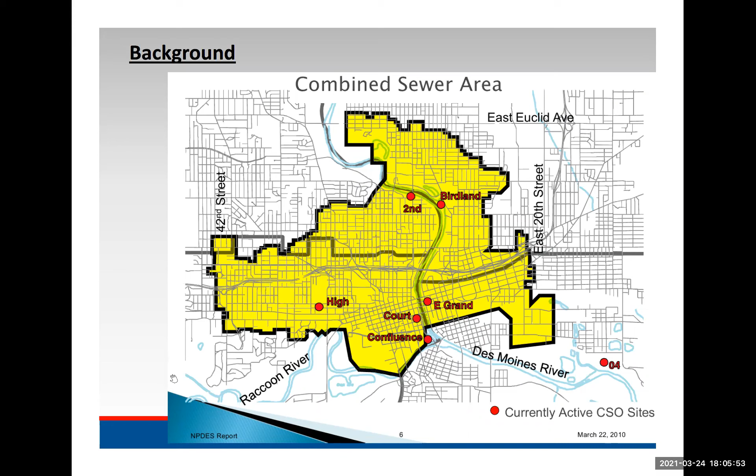In 2003, the city developed a long-term control plan as part of the National Pollutant Discharge permit, and that plan includes a phased approach of capital improvements to eliminate the number of combined sewer overflows, with a goal of eliminating them at the wastewater treatment facility by the end of 2023. This phase, Western Ingersoll, is focusing on eliminating the combined sewer overflow located at this site, and our goal is to eliminate that one by 2023.

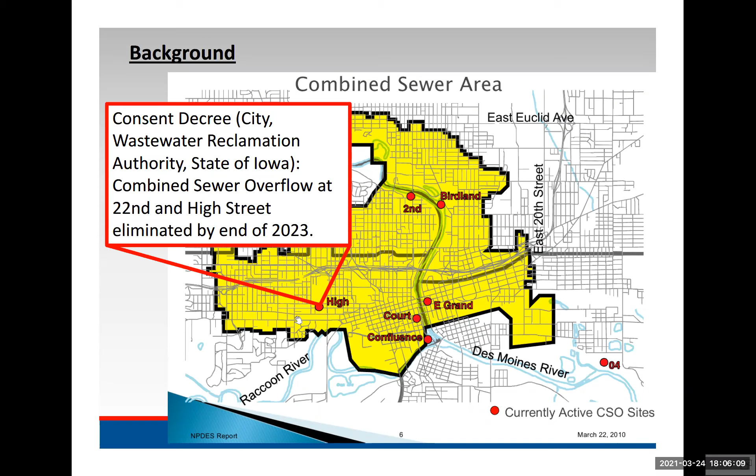So what is the Western Ingersoll project area? Located in the western part of our city, generally bounded by 31st Street on the east, bounded on the south by Grand Avenue, on the west by the line between 44th and 45th, and on the north roughly by University Avenue, Forest Avenue, in that range is the boundary. So that's the basin.

And we have no audio, so. Whoop.

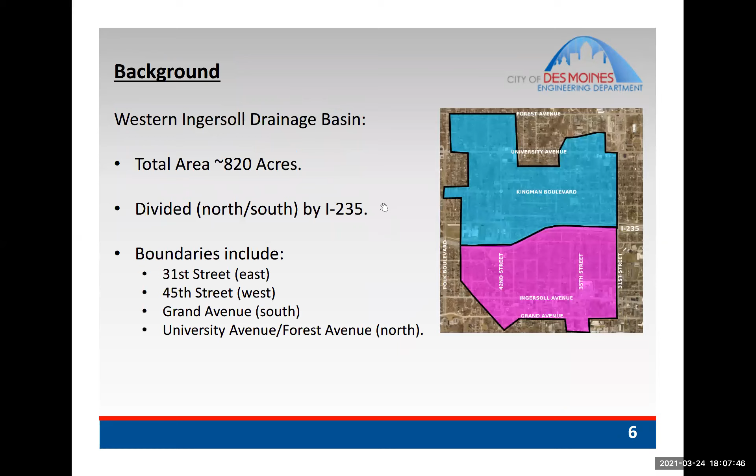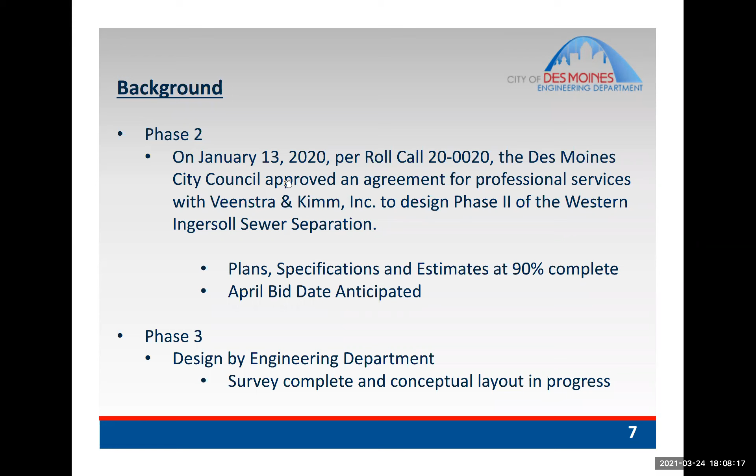So I'm going to turn it over to Dave Camp. He's going to talk more in detail about, so get to your slide here. And Dave, if you want to describe more detail what's going on in phase 2. All right, thanks Steve. Can you hear me okay? Yes. Yep, all right, well thanks everybody for joining us today.

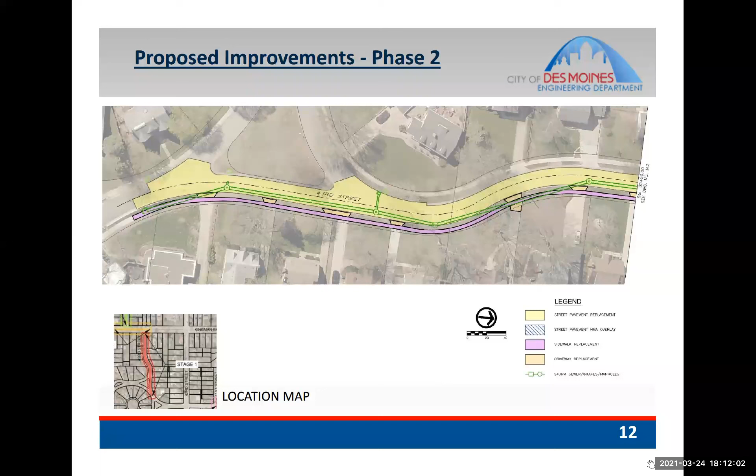So this kind of shows the storm sewer headed up 43rd Street and continuing up to the north, up to Kingman Boulevard. And so we'll be connecting a couple intakes along Kingman, and then scroll down one, and we'll traverse over along Kingman Boulevard over to 44th Street.

Then once we get over to 44th Street, we'll head north along 44th Street. Now we're looking at this - it kind of shows the sewer going up about halfway up 44th Street north of Kingman, and we'll be replacing half of the street and milling and overlaying the other half. Now 44th Street is also on Public Works' list to address pavement condition as well.

So if you scroll down, even though we don't have sewer extending north all the way up to University, as part of this project we're still going to address some of the street and pavement issues up along there. So the next one shows us just stopping up at University. Looking down at the next one, we're going to be looking over and jumping over to the east side of the project and along 33rd Street.

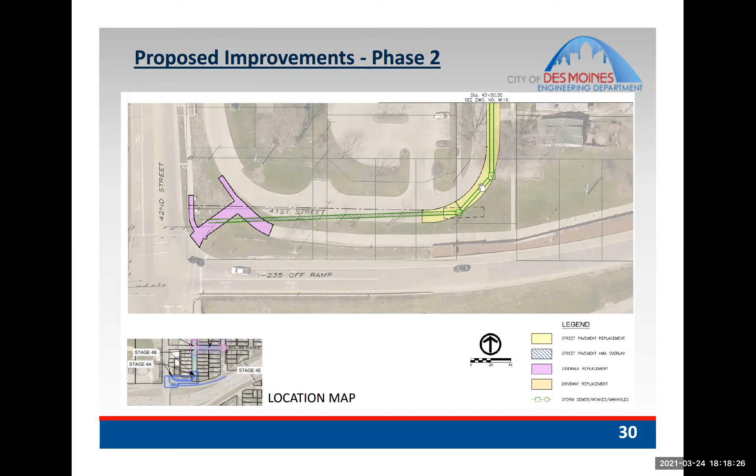So that's why we're showing that dashed or crosshatch line indicating a bore down through this area. As we continue up and around the curve next to the Playhouse, it's the same situation. It's kind of interesting.

The sewer comes up to 41st Street, but we're going to be boring portions of this stretch of roadway, mainly due to access, making sure we maintain access for the Playhouse. Also as we move forward toward the north here, we're looking at boring some additional areas because this is the only egress for the Shops at Roosevelt's back parking lot, in addition to the parking lot in front of the shops.

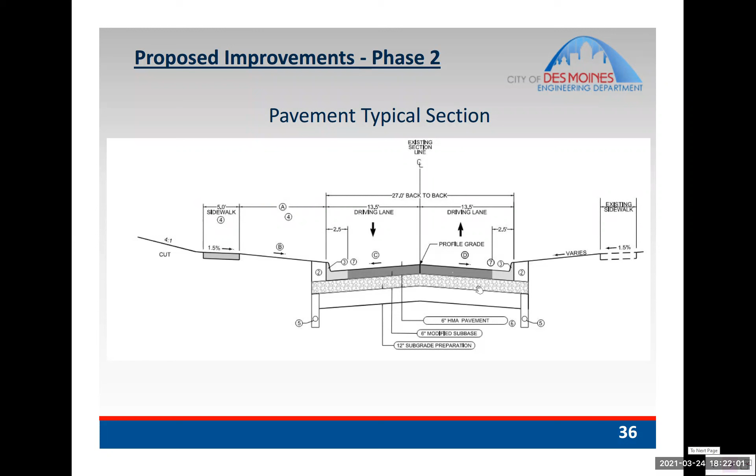As Steve mentioned earlier, the phase 1 project has been out for bids and has been awarded, so that will start here soon, mainly south of the freeway. We're talking mainly north of the freeway with phase 2. We're finishing up the design and making some modifications as needed, hoping to bid that here soon, then start construction this summer, and finish up the project in 2023. The final phase to meet our 2023 deadline would be bidding out that phase 3 project next spring, about this time next year, starting construction and completing that also in 2023.

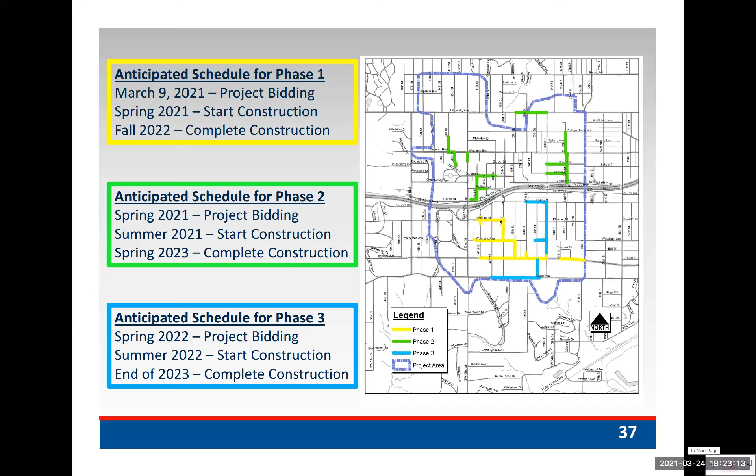That's kind of the schedule and the route forward. We'll take notes tonight and address any questions you have. But if you leave the meeting and think of something, you can always contact Justin, who's the project engineer.

If you want to look on the city website on the project map as well, you can always find Justin's contact information there.

With that, we'd love to entertain any questions or comments anyone has.

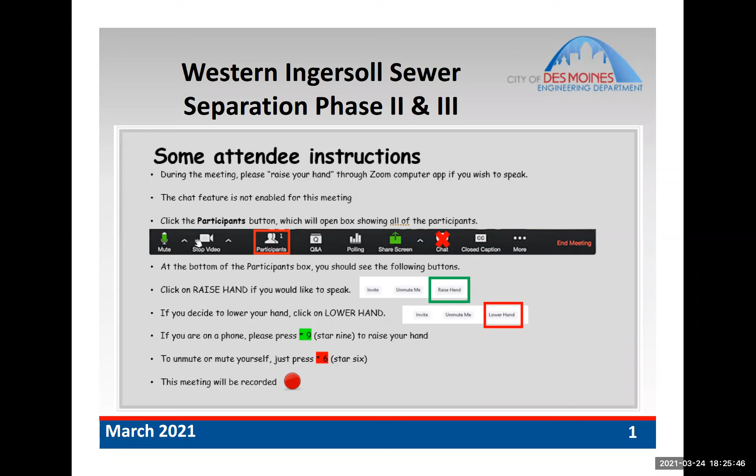You say that this project, I'm on 44th Street, and you said the project will start in the summer. Do you have any sense of exactly when during the summer that will occur? Let's see, I'm going to look back at 44th Street.

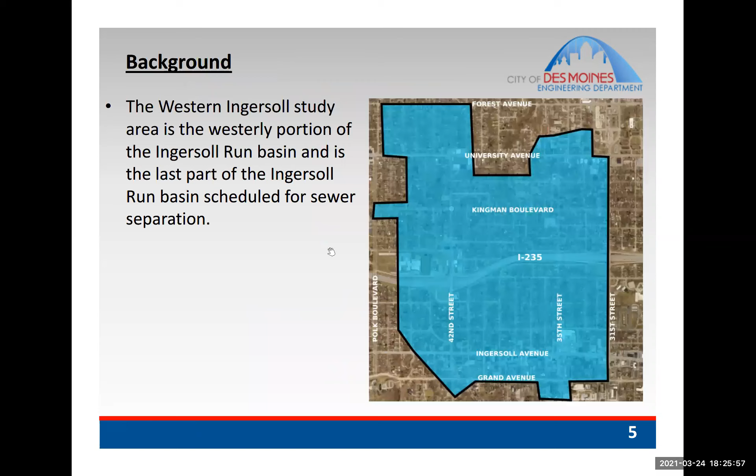So what we'll do is put in a staging plan as what we would think it would occur. But once the contractor gets into the contract, he may adjust some of his schedules and look at that. So that's kind of the best we can give you right now, this summer.

The one thing I can tell you is the area down near the playhouse, there is a gas main that needs to be relocated. Also, that's a very high traffic area for school drop-offs. So we're going to require the contractor to work on that area starting after school next year and complete it before school starts the following year.

If I was betting, and the way we're setting up the staging, I would think they'd start on 43rd Street at the low end up by Crocker and move north. That's my best estimate, that they'd start maybe early summer and work their way up. We will provide the folks along these streets more information and detail as we get it from the contractor and as they start to mobilize into work. So this won't be the only notice you'll get.

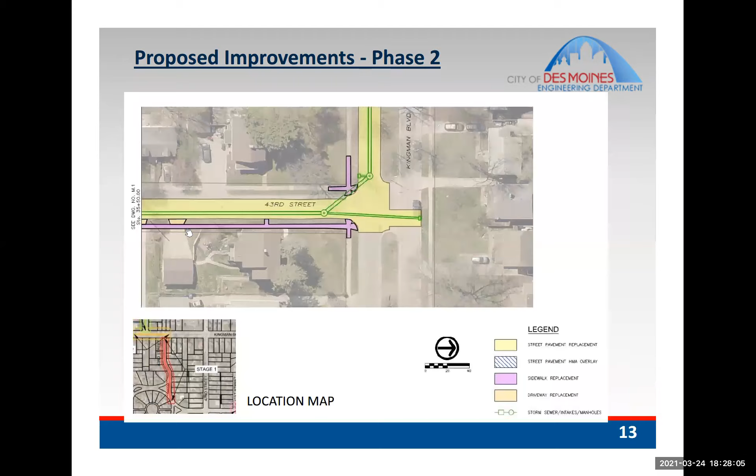Is there any provision for emergency vehicles, if someone would need an ambulance or fire truck while the work is going on? So how we work on these, to be clear, these are very disruptive, I won't sugarcoat it. So our goal is to try and keep local access to residents as much as possible.

As we go through there, we put items in the contract for temporary surfacing and rocking, and try not to remove all the pavement as we're putting the sewer in, to try and keep access back. As we proceed forward, once the sewer is installed, we give a specific amount of time. So we continually work with EMS to notify them of road closures and situations.

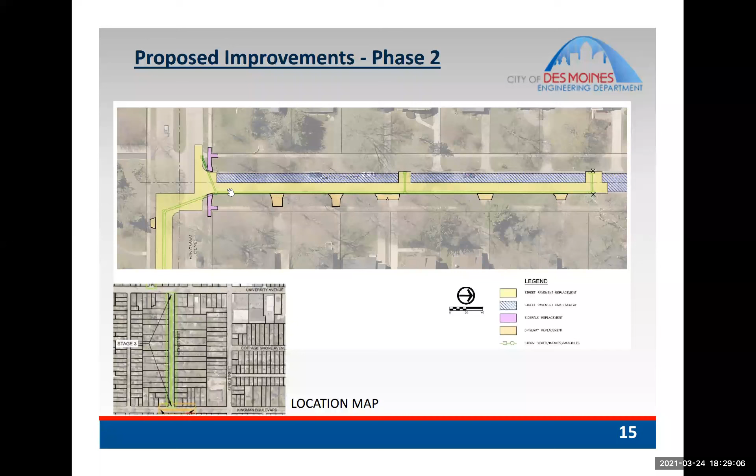EMS is always aware of what is closed. So if they do need to get in there, they are aware of those areas under construction, and sometimes they can just drive through the construction site and that's okay. Other times they know it's an issue, so they know they have to walk up there or something, depending on the emergency type.

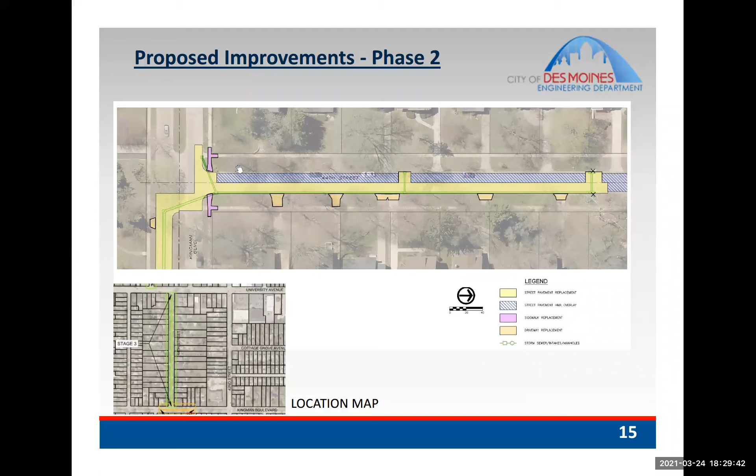I know that in the area south of here, you were talking about doing some permeable pavement. Are you talking about doing that here as well? We focused a lot of permeable pavements in the phase... you're referring to the phase 1 section? Yes. So one of the items was the lay of the land, and the outlet of phase 2 had a lot more constriction to it.

What I mean is, we're tying into some other sewers that needed a little bit of help with the capacity issue. This area did not have, this was designed to accommodate this flow when they designed I-235. So we focused a lot of permeable paving down into the phase 1 area, and that's where we put a lot of the focus. So we're not looking at a lot of permeable paving in this section of the project.

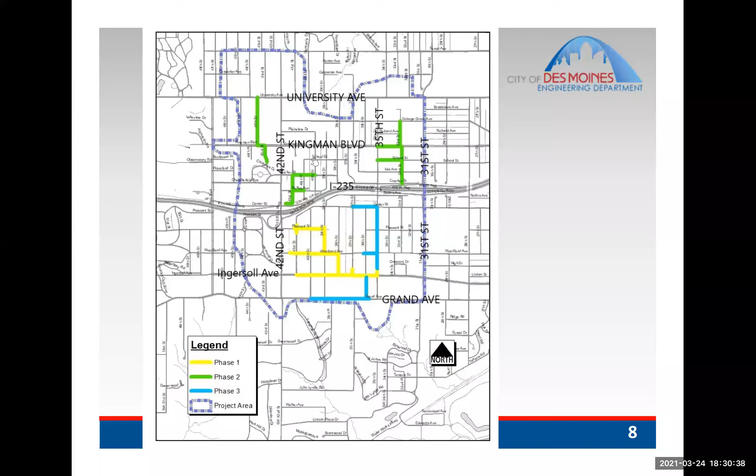Okay, and are we likely to lose trees on the east side of the street on 44th, in the area where the sewer will be replaced in the parking? I was going to see if Brad had the plans available to look and see what you have identified there.

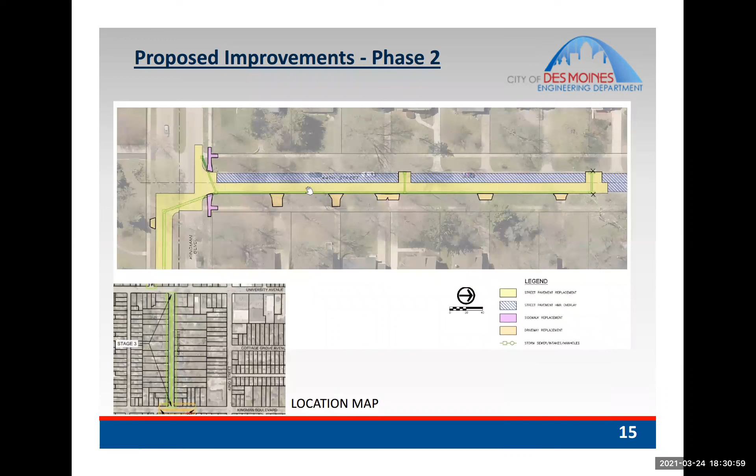Yeah, Dave, this is Brad. The majority of the sewer here is fairly shallow, it's not overly deep, and it's not a large diameter pipe. We are not anticipating losing any trees along this stretch at this time. Okay, that's all I've got.

Thank you. Thank you. Amy? Okay, let's see here. Paul? Let's see if you can unmute yourself. We'll try here again, Paul, and see if we can. There you go, alright, sorry. First of all, I apologize for not being muted earlier on.

Now I'm wanting to know, is it the east side of 44th Street that will be totally replaced? Yes, yep, that is correct. And during that time, will we have any access for those of us who live on the east side of the street? Yeah, so what we try and do is put rock accesses back through to get you back into your drives as much as possible. There will be times you won't have access, for example, if we're putting the sewer directly in front of your driveway.

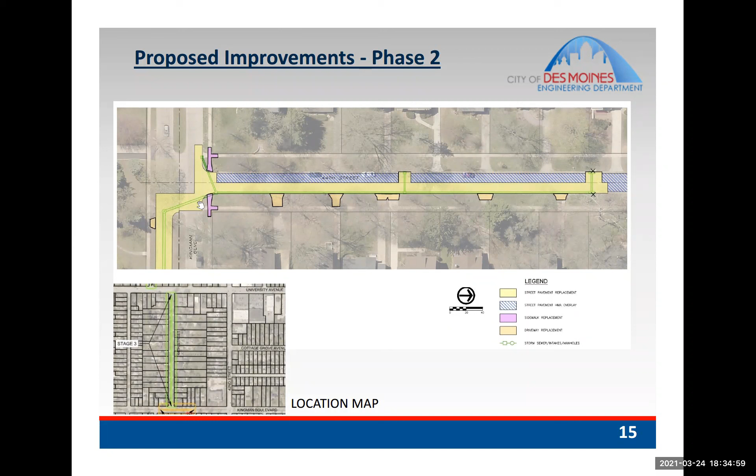Okay, thank you. We were planning on having a wedding mid-September in our yard. We're towards the northwest side of 44th Street, and we're just wondering if we will be able to do that or not.

So are you on the northwest side of 44th Street? What I would do is, I won't get your name and information right now, but if you could email Justin and talk through the details, we can work together with the contractor and make sure that can happen. Do you have Justin's contact there?

Yeah, my wife is writing it down as fast as she can. Okay, and again, you can always contact the city and identify the project, and it'll find its way to us if you lose it. You can always find us on the city website. Go to the project map, and you can get all of our contact information there as well, so that way we can get more details from you, and put some provisions in the contract to make that happen. All right, well, thank you very much.

Okay, I see Meredith. Let me, Meredith, if you could. All right, this is actually your husband. Oh, that's right.

Nope, sorry, yeah, quick question. So on this map, you show different stages of this project. Do you anticipate those going in numerical order, or is it going to be kind of stage one at this point? We're in stage 6D along 33rd Street. We're just trying to get an idea of when that would be, as we're actually looking to put our house on the market, so we're trying to figure out if we're going to have access to our house or not.

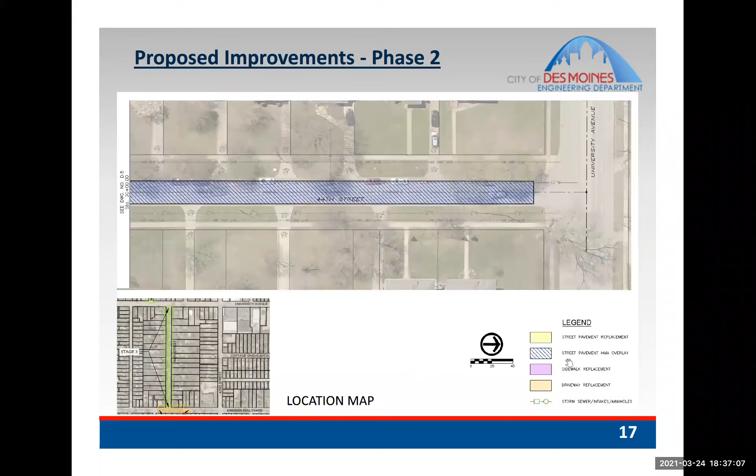So I would assume, and that's something we'd be able to tell you once we get a contractor on board, the exact time frame—whether they're going to try to do that next year or this year. So I would assume it would go in stages as shown, that just makes chronological sense to us engineers, but the contractor may think differently, and might come in and bore a lot of the items together, or try to make it as cheap as possible for them.

So again, if you take Justin's information, he can give you more information as we move through the process. Okay, perfect. I have it written down, so we'll follow up with Justin then. Okay, all right, thank you guys. All right, thank you, do we have any other questions?

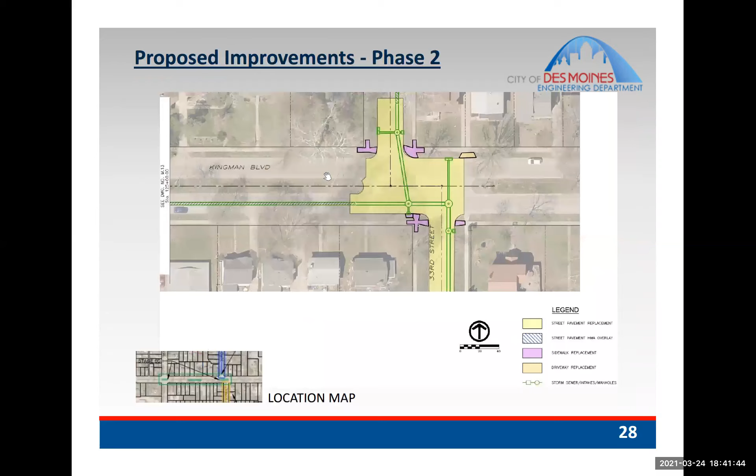Dave, out of curiosity, do you ever have people work separately with the contractor on site to replace their service? That's another option if people want to make an improvement and it's not affected by the contract. Residents sometimes hire the contractor we have working, or a different contractor, and we just coordinate with that. The benefit of doing it while the street is torn up is your contractor doesn't have to replace the street pavement, which saves a lot of money.

That would be completely at the discretion of the contractor. We can't force them to work with you, but it has happened before where people work directly with the contractor. Once we bid it and know who the contractor is, they work directly with the contractor and arrange that. Okay, thanks, thank you Matt.

Okay, do we have any other questions? Great questions, great questions. I'll give it just a few seconds here for questions.

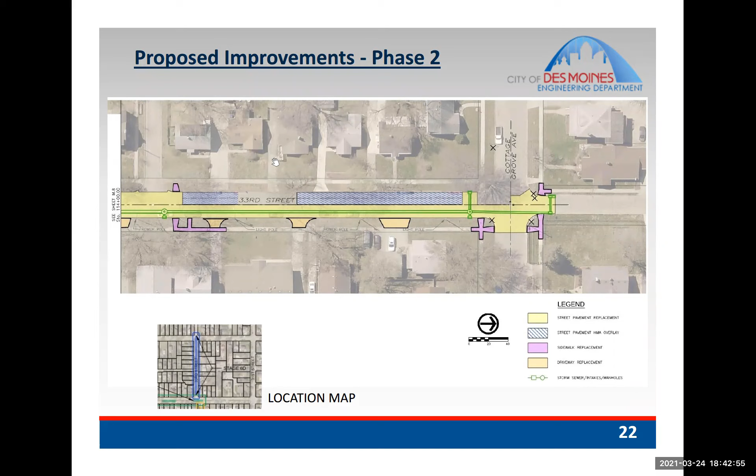If you think of any questions later, sorry for scrolling through the screen so fast, I'm going to put Justin's information up here. You can reach out to us at the engineering department. There will be more notices, especially to those living along streets where sewers get installed, with letter mailings for updates, and once we have a contractor on board, a more known schedule. If you think of anything, please reach out to us. This video and presentation will be posted on the city's website, dsm.city. Go to the engineering department, projects and studies, and you'll find a link to this project with all the background including these presentations.

We'll give one last pause. Okay, hold on a second, I see Paul, let me see if I can get you.

Just wanted to say thank you to our elected officials for participating in this presentation. Thank you so much, Paul. Yeah, I see Councilmember Mandelbaum's got the thumbs up there, Councilmember Voss, Mayor Cownie, thank you for joining us as well. I'm proud, I'm also a resident of Des Moines. I'm proud the city is taking an aggressive approach on infrastructure and knocking this all out by 2023. It's a lot of work and it's impactful to say the least, we're not going to sugarcoat it. Sewer work is impactful, but the benefits are awesome, improving our neighborhood infrastructure, our streets and our sewers to eliminate these combined sewer overflows. So as president, I share your appreciation and thank our electeds who are moving this forward. Thank you so much, Paul. Thank you.